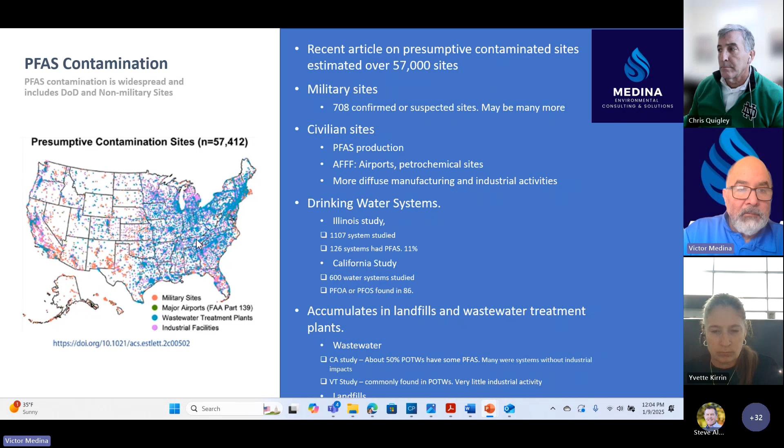I'm going to start with water, and there's a lot of different types of water that may need to be treated. Drinking water usually is good water quality to start with, so that can be kind of straightforward to treat. But obviously, the big issue might be that with drinking water treatment, there's no room for error. We have to get to the MCL and preferably non-detect. Really, people don't want this in their water at all. And then water from remediation can vary quite a bit in its quality, so it may need additional treatments.

Municipal wastewater definitely has a lot of, even after treatment, a lot of stuff in it, so this treatment can be very challenging. So could industrial wastewater, landfill leachate. And then, of course, equipment decontamination usually is pretty concentrated. So there's different types of approaches that can be used for these different kinds of water sources.

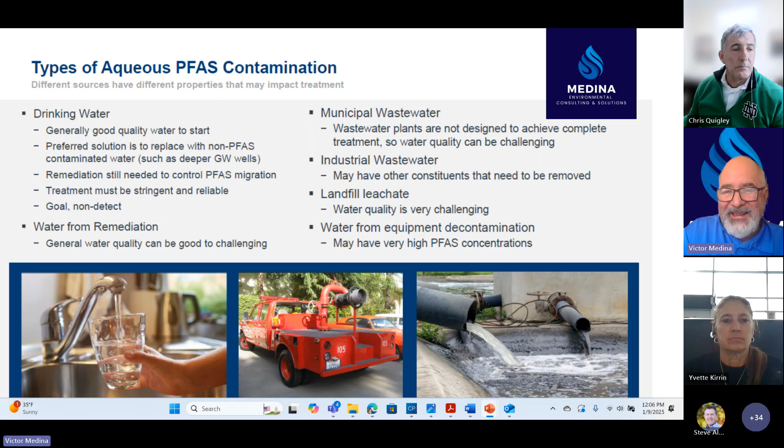Now, PFAS has drinking water standards. They were set in April 2024. They're quite low - 4 nanograms per liter for PFOA and PFOS, PFNA, PFHxS, and GenX also are at 10. And then, for the first time, there's this hazard index that's used, based off of several of these species - PFNA, PFHxS, and GenX - but also includes PFBS as well. It has a calculation that must also be passed to meet the drinking water standard. That's the first time it's ever been done for a drinking water standard.

So these are official drinking water standards, but there's a timeline for water treatment, for public water treatment facilities, and from what I understand, that's any water facility that has 15 or more connections.

They need to by 2027 complete monitoring for PFAS and release those results to their customers. Now, they don't say the month. The EPA is kind of like that sometimes. They say they're going to do it, and then it may end up being the due date may be December 2027, or it could even run into 2028.

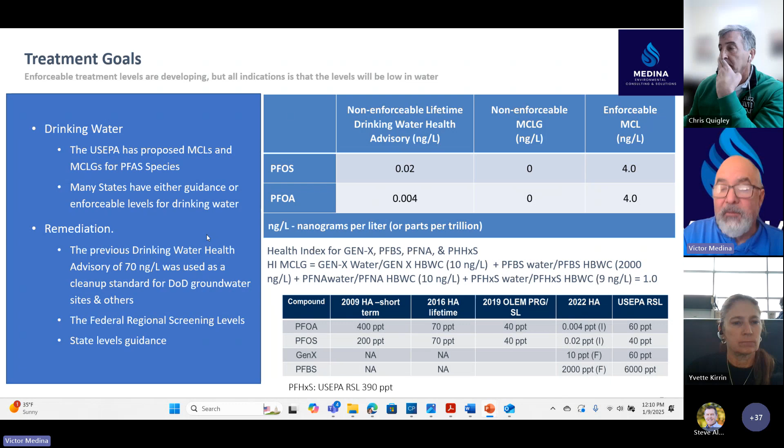So some of the technologies include granular media separation, very simple, just put something in to absorb the compound. It's very established for PFAS removal, can meet low levels pretty fast, and it's very effective for PFOA and PFOS. It starts losing some of its effectiveness for some of the shorter chain PFAS, which are currently not being regulated, but still could be a goal for a project.

It doesn't require a concentrate, and maybe for a larger system, regeneration could make sense. It doesn't destroy the compound, it just concentrates it. The media will have to be replaced continuously over time, and the process has to be monitored because as it gets filled, you could have some breakthrough.

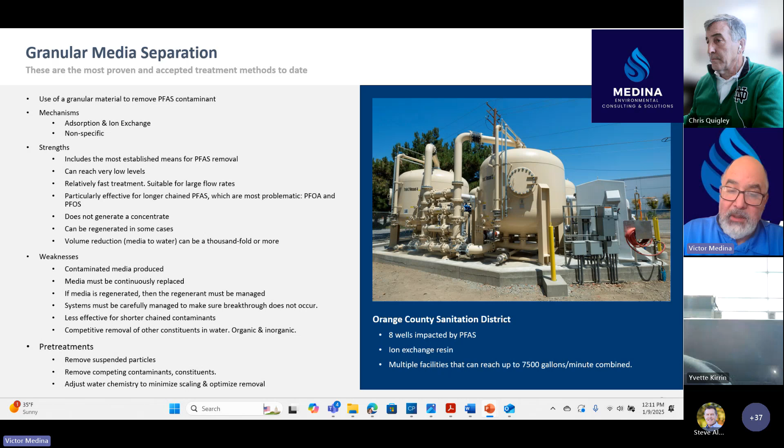This is a picture of a system at Orange County Sanitation District using ion exchange resin. And some of the materials, the two most popular are activated carbon, a very strong absorptive material used for many years for a lot of different applications, and specialty ion exchange resins, which are designed to actually work with a combination of ion exchange and adsorption.

So they kind of work similarly in some ways to activated carbon in that they absorb PFAS, but they also have that exchange component, which tends to help them do a little bit better with the shorter chain compounds. And they tend to have significantly higher capacity than granular activated carbon. So they're sort of a balance. Activated carbon is cheaper than ion exchange resin, but ion exchange resin can have a higher capacity and maybe remove shorter chain compounds. So it just really depends on the goals of the project.

In the short term, ion exchange might use a smaller system and be cheaper to build. But then as you start factoring in the change outs, you may find that the GAC is better.

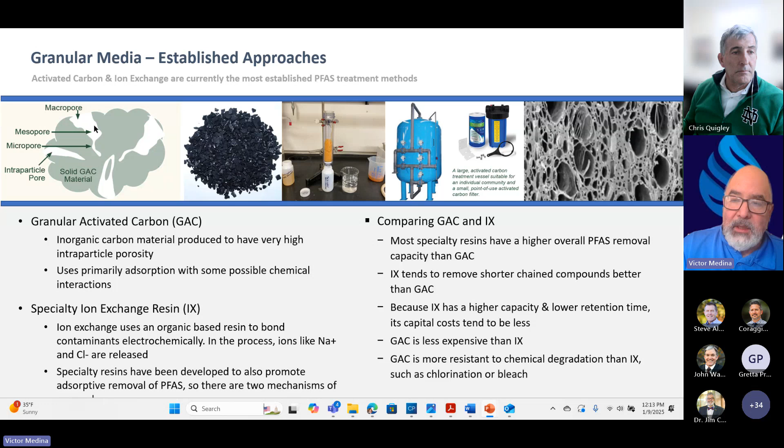And when I was at the Corps, we did some testing of different resins and different carbons that were used by the Corps or that they wanted to use. And we found that the Calgon carbon F400 had a significantly higher absorption capacity than the other ones that we tested, like TIG and I think Evoqua. But once again, it comes down to cost too, because maybe some of them could be cheaper still and still turn out to be a bargain anyways.

Some new stuff to look at are clay materials, zeolites, biochar, graphene. Graphene actually has a very high sorptive capacity for stuff, and so we may end up seeing some interesting graphene products in the future. MOFs, metal organic frameworks, and hydrogels.

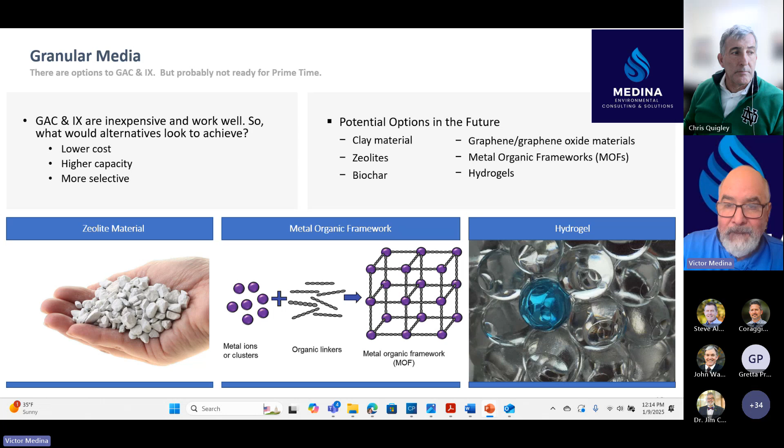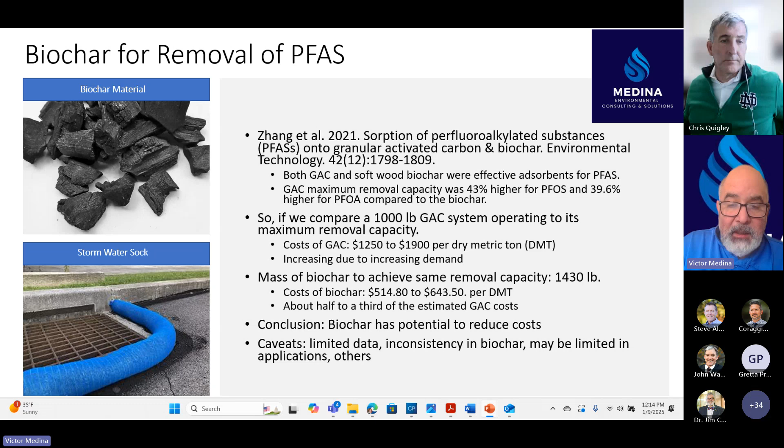I'm very interested in biochar for treatment because it's cheaper, and I did my own calculation comparing biochar to GAC. Even though you'd have to use more biochar, there's potential for reducing costs. I think biochar could be useful for remediation or water treatment, maybe in conjunction with ion exchange or GAC. So we'll keep an eye on this material and see how it does.

Membranes work, obviously, and are very effective for treatment. Technically nanofiltration should be good enough, and reverse osmosis even better. But the big challenge with membrane technologies is the generation of the concentrate, because even if you're getting 90% treatment of the water, that remaining 10% can still be a huge amount of water. That's really been the resistance to membrane treatment for PFAS. There are some places that use it, but usually they're wealthier water treatment districts or communities. Most of the time the focus has been on granular media treatment.

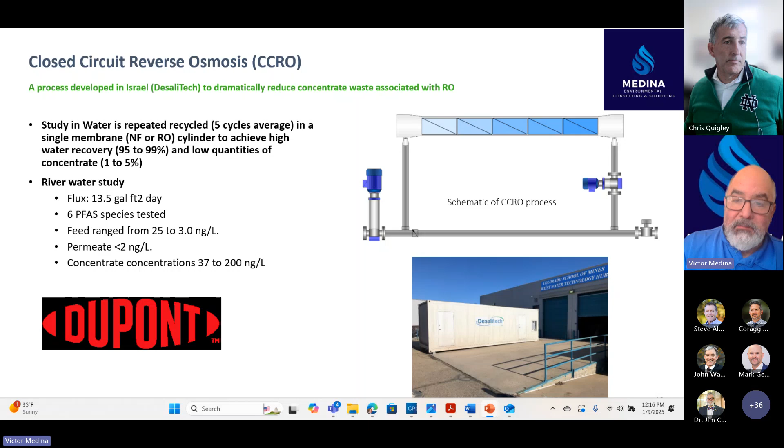But some possibilities could be like closed circuit reverse osmosis, which generates very little waste. But they do have the disadvantage of being extraordinarily expensive.

Another technology that has really come a long way is surface active foam fractionation, basically taking advantage of the fact that PFAS is a surfactant. It bubbles, and you can then collect the foam. If you just do it one time, you can get rid of a good chunk of the PFAS, but the concentrations are still kind of high. But if you do it sequentially and continue to apply it, possibly using additives as well, you can actually reach pretty low nanogram per liter levels. Some studies I've seen have actually met the drinking water standard, so it could be a very nice technology.

One nice thing about it is that it's less prone to competition from other types of materials, because when you're doing sorption or granular media, you're taking out other stuff too, and that's part of your system. But when you're doing SAF, you're really focused on whatever can foam, so that's mostly the PFAS. There could be some other constituents, but that's the advantage of the SAF system.

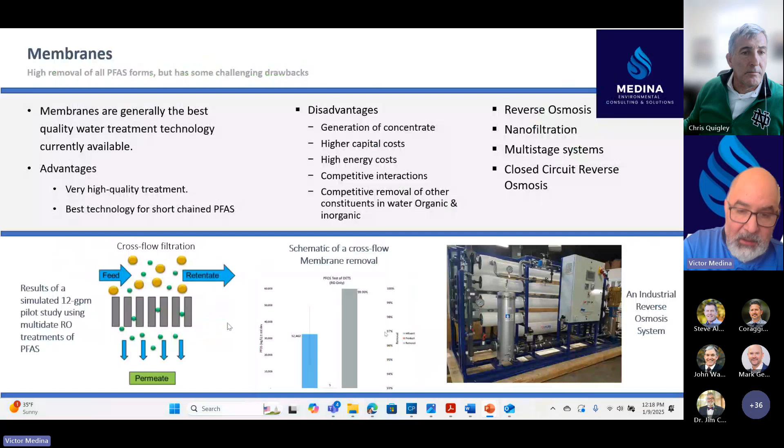In my limited experience, and I have done some experiments - this down here is an experiment I did with PFAS removal using membranes - the compounds don't appear to have any issues with degrading the membrane. But they are fairly long chain polymeric type compounds, so there would be a need to address fouling as a potential issue. Using appropriate backwash plans should be sufficient to extend the life of the membranes and keep it an effective treatment technology over time. Does that answer the question? I believe so, yes.

So, residuals - there's all kinds of stuff that's generated. A lot of these things I just talked about, none of them destroy the compound. It's just left there. So even if we do a regeneration, that does reduce the volume, but the regenerant is full of PFAS, so we need ways to get rid of it.

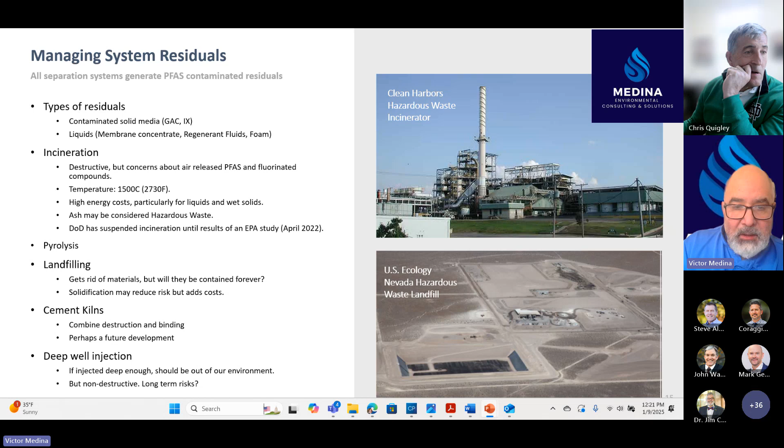There are some destructive technologies. Several were tested when I first got involved in PFAS, like around 2012. We tried to use activated persulfate and Fenton's chemistry to destroy PFAS, and it works. If you had a site that only had PFOA, these could actually work, but they don't degrade all PFAS, and most sites have PFOS. So that's why they've kind of just dropped off by the wayside.

There are some new reactions in DMSO that were published, but they really haven't gone anywhere in terms of having a successful upscaling.

Probably the most well-studied and maybe most attention is supercritical water oxidation, getting the water to the supercritical point, high pressure and temperature. The water behaves as a fluid. These systems can degrade PFAS.

Some of the studies have shown really good degradation, and there are commercial systems available. But probably for me the biggest issue is that the rates for these systems, even the bigger ones, are pretty slow. They're usually on the order of maybe a fraction of a gallon per minute. I think there's one, General Atomics, that's like 3 gallons per minute.

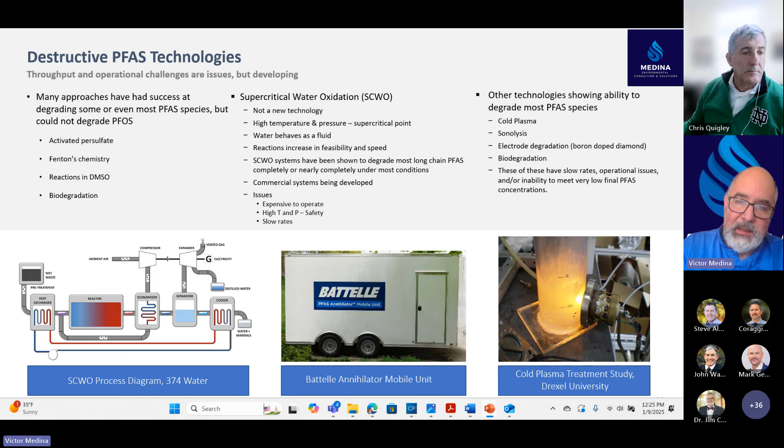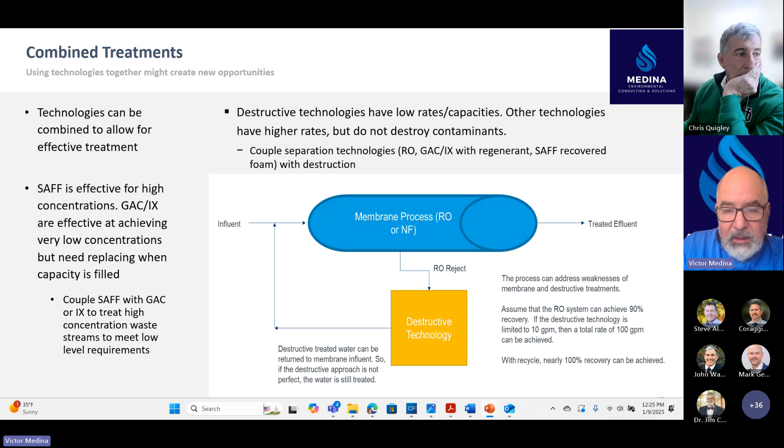Another idea would be combining treatments, like reverse osmosis or a membrane process, and then combining it with a destructive technology. That could be something that might be developed soon, I'm thinking, but in the future. I haven't really seen a successful unit yet. That was actually one of my goals when I was at the Corps, but now I'm kind of focusing on that as something I'd like to try to put together for a proposal.

There are some other ideas: plant uptake, phytoremediation, like uptaking the contaminants in the plants and then incinerating the plants, for example. Partitioning solutions, can you apply like light oils or solvents and then extract those? Or metal adsorption, like zero valent iron, sort of like the old zero valent iron reactive barrier, except in this case you're just using it to adsorb the PFAS. It's not really degrading it.

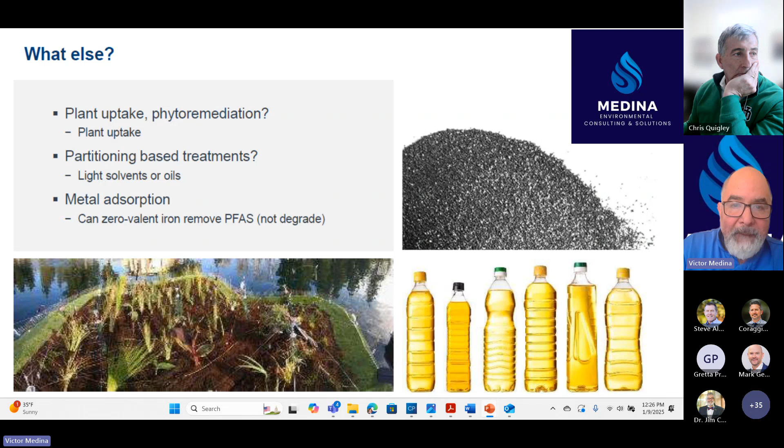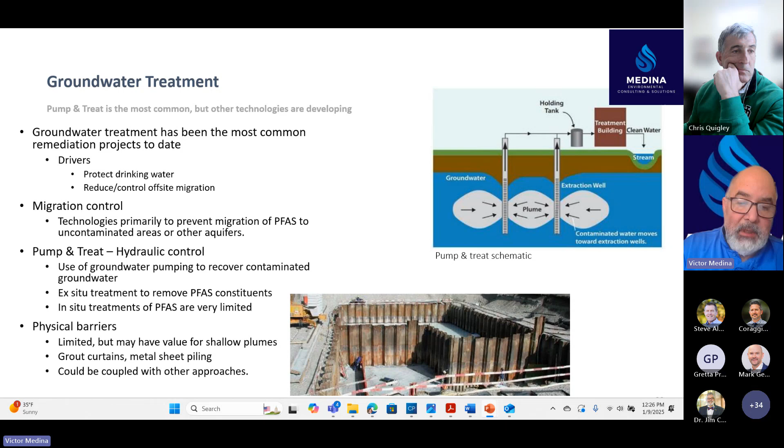Now I'm going to discuss a little bit about remediation. So groundwater treatment - right now there's a lot of pump and treat going on. It's not really a treatment, it's more of a containment process. Physical containment processes could be also used as well to keep the PFAS from migrating into the wrong places. That's a viable strategy.

In terms of treatment, there's not a lot, but here's a few things that have come up. One of them is this PlumeStop material, which is a powdered activated carbon material, liquefied powdered activated carbon that is being injected into aquifers and appears to work pretty good. It definitely seems like it reduces the PFAS migration and seems to have potential for longer life. There's some new products that are similar, made out of clay materials.

In situ sonolysis is something that is being studied, I think, up in Clarkson University, and I think they've had some success and some other challenges. Sonolysis is a use of sound waves to create microbubbles, cavitation that create reactive oxygen species, chemical treatments. And as I mentioned, the big problem was the inability to degrade the PFOS compound.

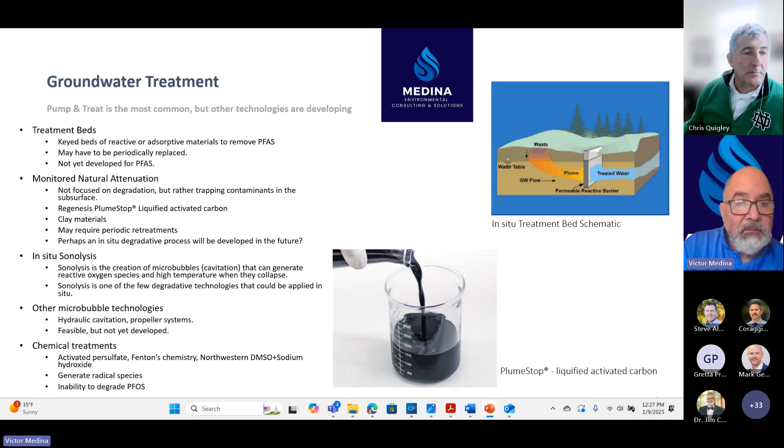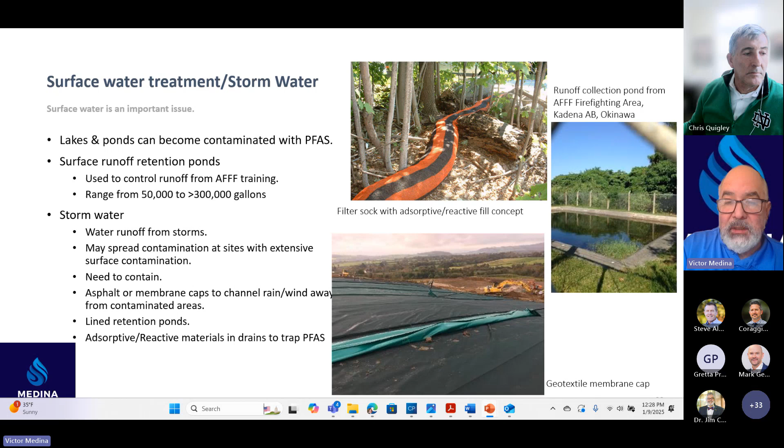For surface water, containment could be very important. The use of runoff ponds or storm control systems could be valuable for soils that contain PFAS. And for these small accumulations, when I was at the ERDC, we developed the PETS system to treat them using ion exchange resin, a reactor system to treat runoff collection ponds through Florida, Japan, and Tennessee. So that's something to consider if you have a small accumulation of PFAS.

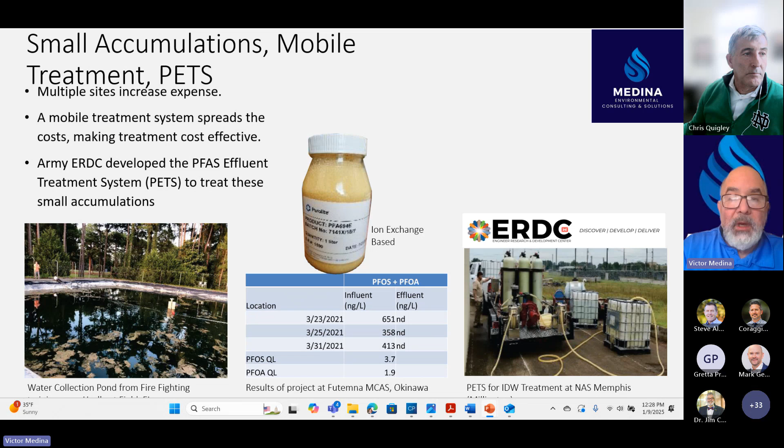And then sediments, if we talk about that, the key to dealing with sediments or soils is size separation. You want to separate out the sizes. Usually the larger materials may not need treatment, or you could get by with a rinsing treatment. But as you get smaller, you may need something like sediment washing or thermal desorption, which is getting more popular.

Also, often for sediments, what they do is mix in activated carbon into the sediment, and they apply that with the idea that the carbon can capture the contaminant and keep it in place.

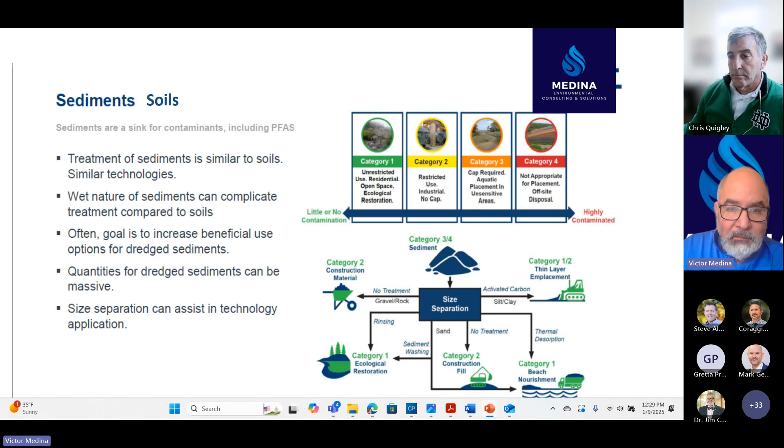One of the more interesting developments in sediment treatment is smoldering combustion for soils and sediments. They describe it as making the soil into a briquette. They typically mix in something like activated carbon into the soil, and then they heat it with low oxygen, so it burns all the way through, and it's actually pretty effective. It's something to definitely consider.

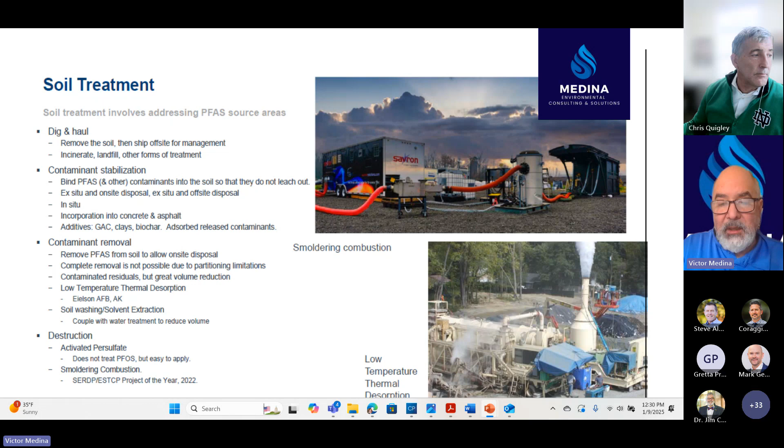And low temperature thermal desorption also has had some really good successes for removing PFAS. Then you'll need to capture it. The smoldering combustion destroys the PFAS, but the low temperature thermal desorption desorbs it from the soil, and then you have to capture the PFAS and dispose of it after that.

Another material kind of similar to those is fluorosorb, which seems to also have some very interesting results in terms of being a good material to stabilize PFAS in soils or other materials like that.

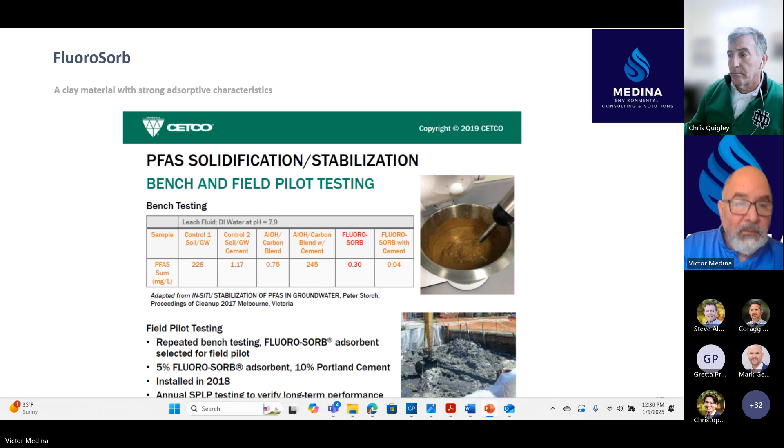And decontamination of firefighting equipment - this is a process flow diagram I designed to do that. Basically, you usually use multiple flushes to remove the PFAS and then collect the water, and you can actually treat it and reuse the water if you want to. So you can do the treatment.

There are people who have discussed the use of additives. They are expensive, and it's not really clear how well they work. But on the other hand, maybe it's better to use them if your customer can afford them than not.

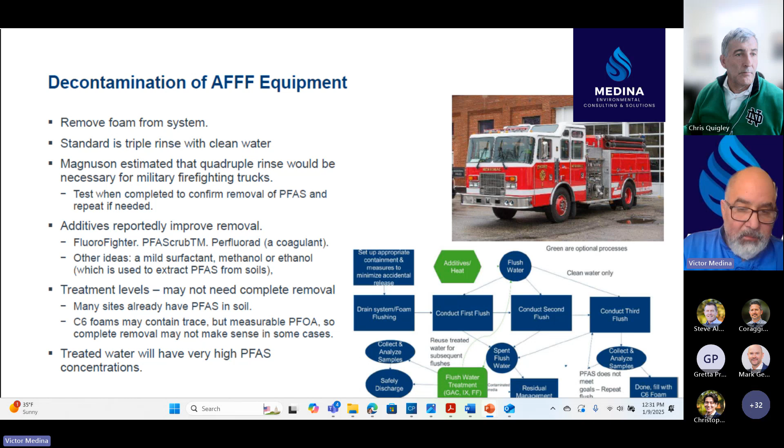So drinking water, 537.1. Everything else, including wastewater, soils, animal tissue - 1633.

That's one of the challenges with PFAS, is that there's no online or quick way to get it analyzed. It's all done by LCMSMS. If you're lucky, you can get a 2-week turnaround time, although some labs are improving, but usually you're looking at a month or more.

And then the total oxidizable precursors assay gives an idea of materials that can combine and form PFAS. So this is also sometimes commonly used in studies for spills and such like that.

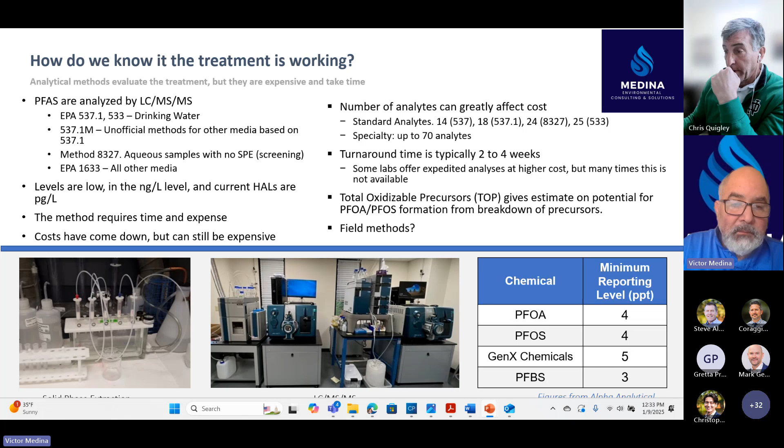And then another concept is using point of use or point of entry treatment for communities that may not be in a position to upgrade their water treatment systems. So this could actually be an important tool as a means of dealing with PFAS. Obviously, another way to deal with it is just to provide everybody with an alternative drinking water source. But these systems can be very valuable. I've seen some programs, like in New York State and New Jersey, where the state is helping people install these kinds of systems.

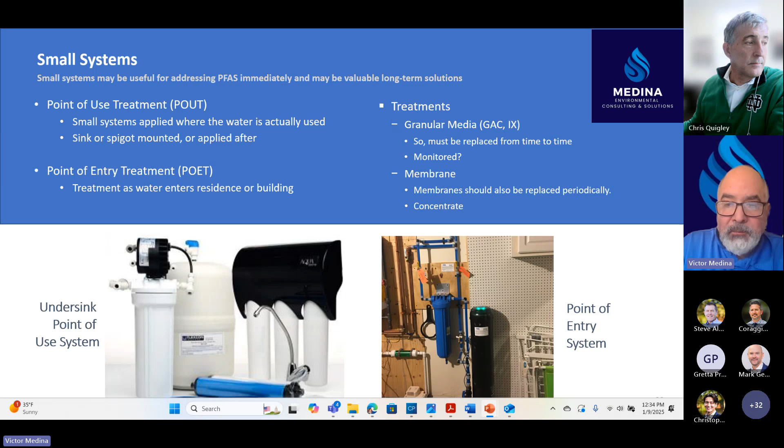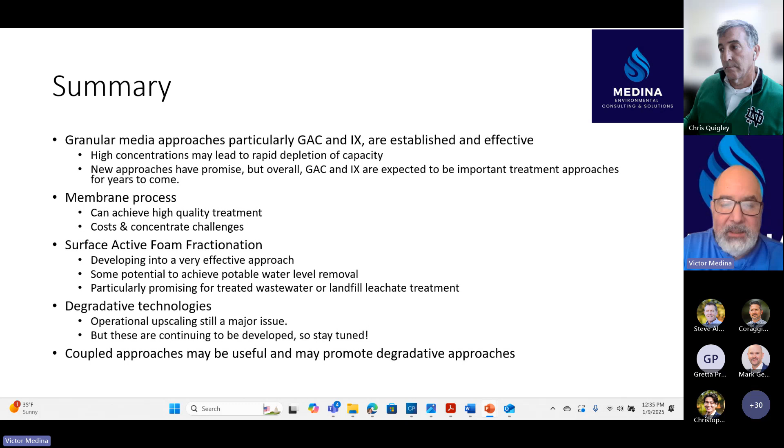So I'm summarizing, there are some effective ways to treat PFAS. Most of them involve just removing the PFAS and concentrating it. The destructive technologies, I think, still need some work, particularly getting them to work at a higher rate. But as time goes on, hopefully those will catch up, and there will be some destructive techniques available that are cost effective.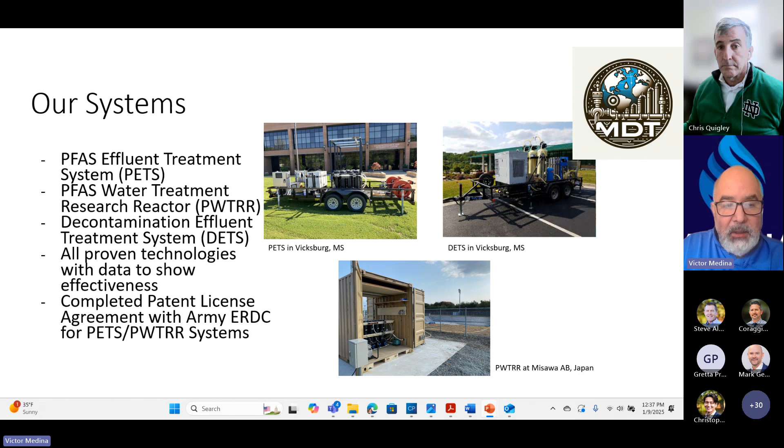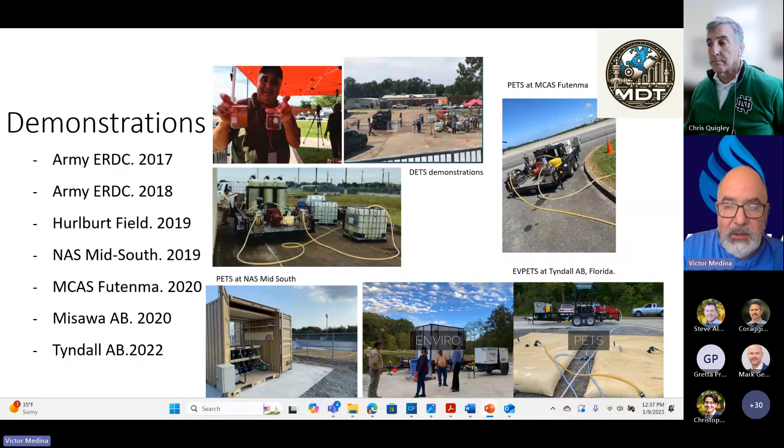We have all of these technical reports and data to show their effectiveness, and these were some of the organizations that funded our work. These are some of the demonstrations that were conducted on these units to show their effectiveness.

This is results from one of our most recent tests in 2023, treatment of a runoff collection pond from a firefighting training area at Tyndall Air Base. This was a firefighting training area, and it had a system that would return the water to a pond. The pond had an evaporation system which would further concentrate the water. So this would be water that you would never use for drinking water.

But we had a pre-treatment system to remove petroleum, metals and such, and it worked quite well. We were able to meet all the MCLs for that, but it didn't really remove the PFAS very much. This kind of shows that what we got into our pre-treatment system was pretty much what came into our PET system in terms of PFAS.

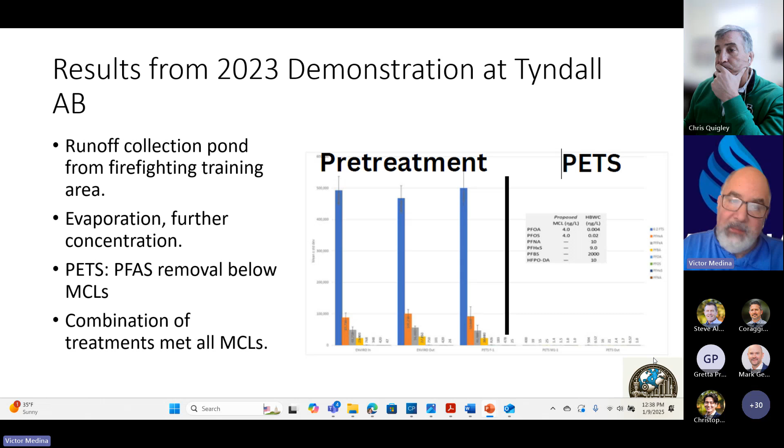But once the PETs was applied, it worked quite well, and in fact it met all of the MCLs for the PFAS species that we looked at. So this tells us that we can meet the MCL. It's not impossible, probably kind of expensive, but it certainly can be done.

Some other things - when we used our systems in Japan, we were excited to go, but we couldn't because of the COVID pandemic. So we used video tools, and we were able to train the base personnel to operate the system and use it. So the systems are easy to use, and they can be shipped by sea and air.

And we've driven them over 1,000 miles. We've operated them for 24 hours, and they have met the EPA MCLs. We have a technology transfer agreement for these PET systems from the Air Force Civil Engineering Center.

So we had to meet specific criteria from them to obtain the agreement, like treating below 70 nanograms per liter, and being able to be towed by a 1-ton truck, that type of stuff. We've already done that, so it should help lubricate the process of adapting them.

The projects have been funded by the DoD, so we have data. It's not saying that a pilot project wouldn't be a bad idea, but it may not necessarily be necessary. We've done customer discovery through ICORE and through conferences, and have gotten positive feedback.

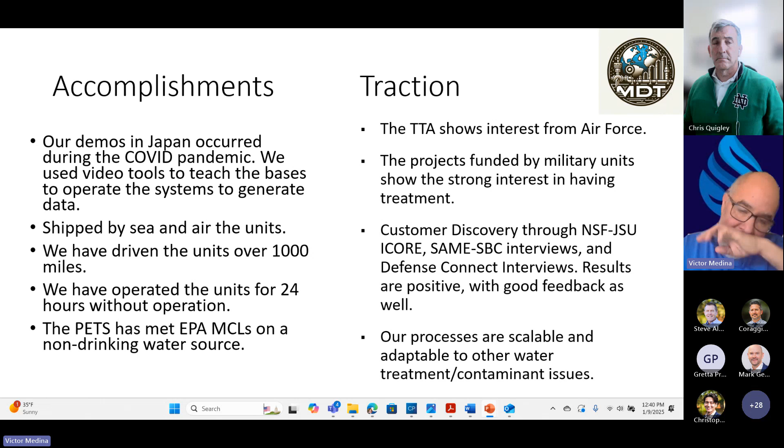And these processes are scalable. So even though our systems are kind of small, our plan is to build any size system that we can provide and treat different types of applications. Also, I want to point out that the system is adaptable.

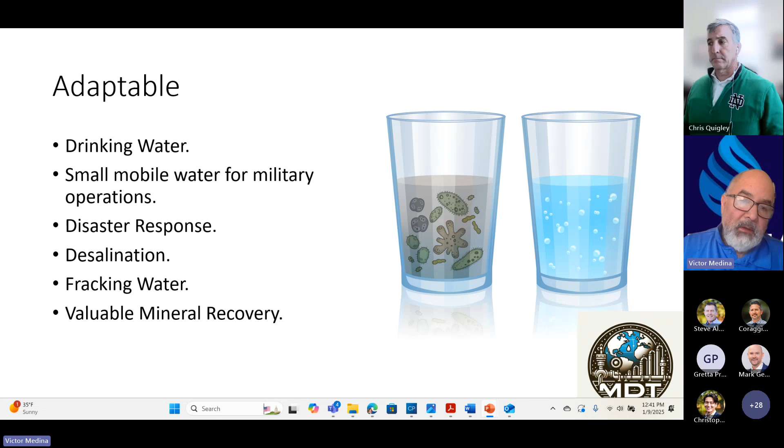Some of the things we're looking at is maybe making it smaller for mobile water for military operations, or using our systems, maybe changing out the media for disaster response, or desalination, like particularly in Louisiana, where they're having a lot of problems with seawater encroachment into their aquifers, fracking water, or valuable mineral recovery. The same types of processes that we use in our system can be used to treat other kinds of contaminants and other types of uses.

And we also are developing a business for a point of entry system. We call it the Magnolia Poet, which could be used to treat contaminated water coming into homes or into a number of homes. I think this could be very helpful for military housing applications, for example, as well as communities throughout the United States.

I think that's all I had today.

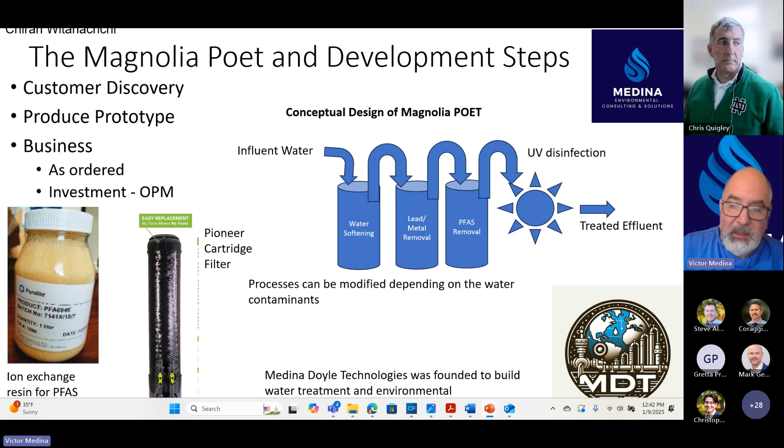Thank you very much. On those mobile treatment trailers you have, what kind of flow rates can they handle? Yeah, they run right now - those systems I showed run between 2 to 20 gallons per minute.

A lot of it depends on whether it's a fairly clean water source. We can go up to 20 gallons per minute pretty easily. But like the source at Tyndall, we had to run closer to 2 gallons per minute because it had so much stuff in it. It could overwhelm the system. So those can run between those levels.

We did projects where we treated... I mean, we are a research organization, but we literally pumped out the entire contents of the Hurlburt Field water collection pond. So it's basically like a remediation for that pond. We certainly, even though the rates aren't exactly the fastest, they're fast enough for those types of applications.

How are you advising the local water suppliers on what costs they should expect if they have to implement this on a larger scale?